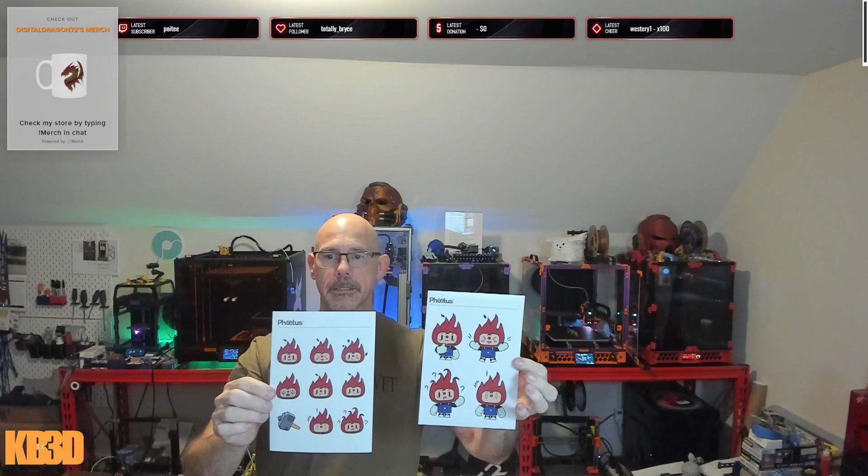And then the other thing that came in was the long-awaited 10th anniversary box from Phaetus. So we got some Phaetus stickers. Always cool to have stickers, right? This was the thing they were doing on Twitter where you printed off their little guy here and got things. So I got stickers and I got a shirt.

Apparently it's the Rapido 2 shirt in white. And I just realized that it comes complete with a hole, so I have a hole in the shirt. I don't know what hit it, but that's no big deal, it's in the back, we can fix that. But yeah, it does have the Rapido schematic on it for the exploded view, so that's kind of cool. Another shirt we can add to the t-shirt collection.

And then we got some of the AE Worthy ABS glass filled, 10% glass fiber reinforced ABS, it is black. I was going to show it to you, but apparently it's well sealed, so we'll have to do that on show sometime. Nozzle temp 250 to 270 C, bed temp 100 to 110, 30 to 90 millimeters a second print speed, 0 to 20% fan, and of course a nozzle that can handle abrasives. We'll add that, we've got several printer builds coming up, we can use this in one of those.

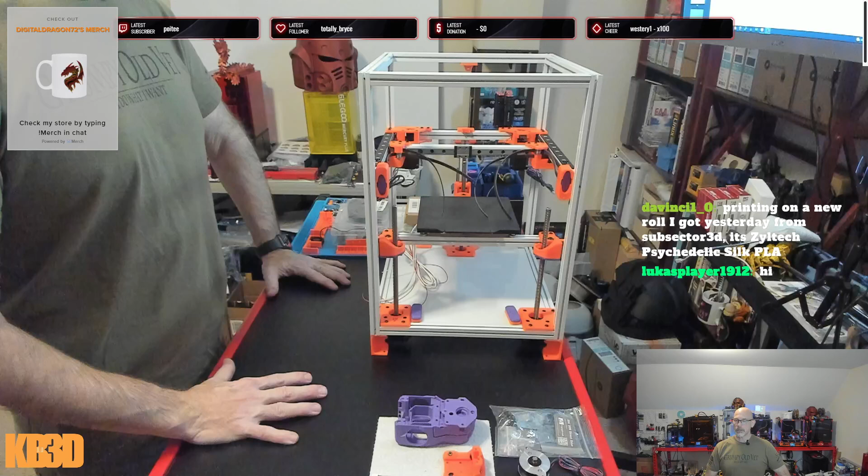So you may notice a couple of differences tonight. We've got this camera, but we also have that camera. The camera over here on the left side of the screen is the Logitech C920 that used to be right here. This is my other Brio camera right now, so we'll be working with the Brio cameras as the primary and secondary view. The 920 we'll be able to bring over here and sit on the desk if we're doing something where we want a little bit closer in. I still want to get a ceiling camera mounted, one of these days I will get there, and it'll probably be one of these that'll go up there.

But yeah, stay in your lane, KB3D. Make it home safe.

So I got another batch of stickers. Originally when I ordered my stickers they got delivered to somebody else, so I just chalked them off as lost and ordered another set. I've got plenty of those stickers now. I still haven't received the shirt or the hat that I ordered. We'll see, maybe they're coming, maybe they're not.

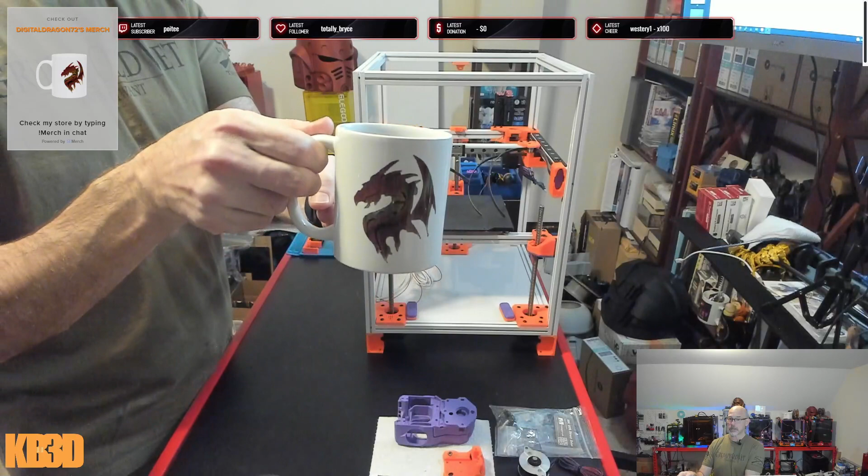I know the hat, since the shirt is silkscreen, so we should be good with this design here. Should work fine for silk screening, right? They were having a lot of issues with the color transitions and the embroidery, so I think I'm just going to take it down to straight red, get the outline, make it red, and do that for the hat.

So, where were we? When we left off, we had run our belts. They're very loose because they're just sitting in there right now. And we were starting to build our boop, and in order to build boop, we needed to...

work with the tap. So what we did was we had all the printed parts for boop, except for the magnet holders - these things. I printed those out and was checking the tolerance and fit of the magnets, and yeah, the magnets go in, they fit well.

I was just feeling froggy today between meetings and training meetings, so I went ahead and put in the heat sets on these. They have a heat set on one side and the magnet, and it will go in your holder here, and that's where we're going to get started.

Now, I did notice that some of the screw sizes are a little different, and that's why we need to have CAD up to look at it. I did go ahead and put Fusion 360 up here so I can check what size screws we have and so on. So that's M3x6 for the belt clamps and stuff.

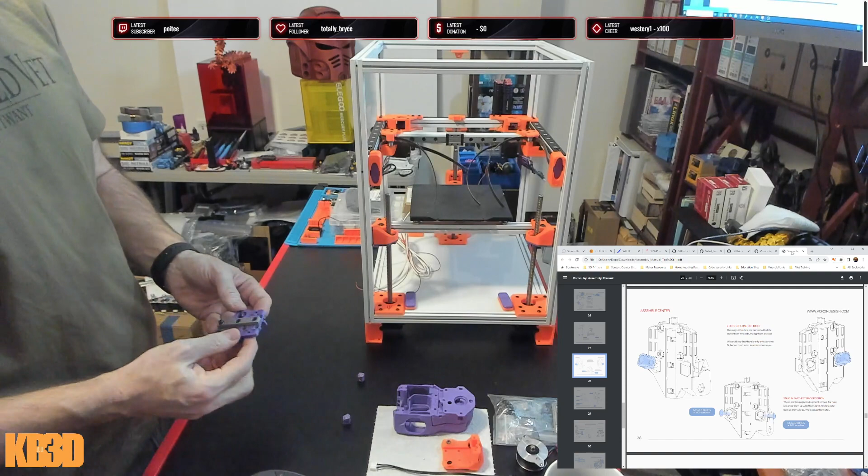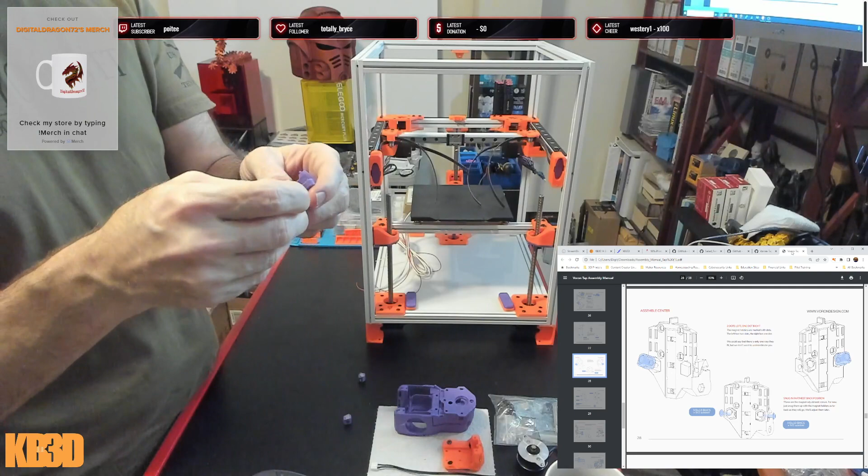You may see me doing some stuff off screen - that's just me clicking around trying to figure out bolt sizes, because I know some of them will be different. One thing I don't see called out in the tap, but do see in the CAD, is there are two channels on either side. These two channels take an M3x40. This just sits down there, and we're going to screw it all the way in to provide some additional rigidity here. We need to start off by doing that before we get too far, since I'll simply forget otherwise.

But yeah, how's everybody doing today? The 3D printer workshop is almost back together.

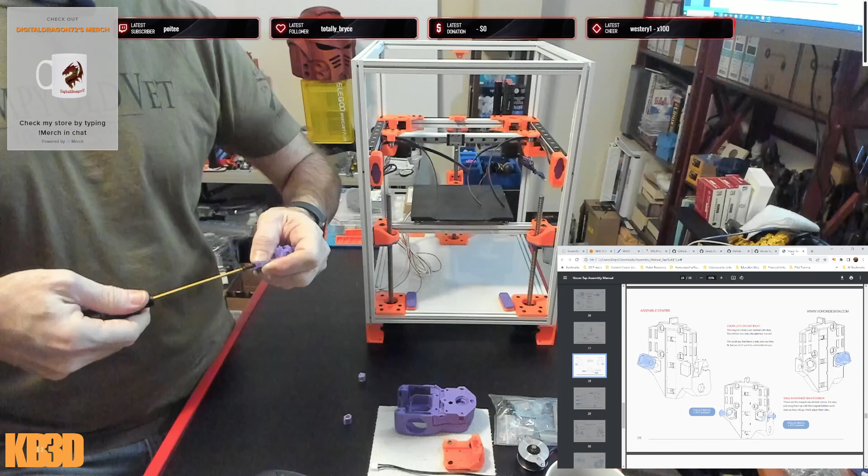Well, Timur, that all depends. If it turns out being easier to work in the workshop and easier to find things, then I would say it was worth the time and effort.

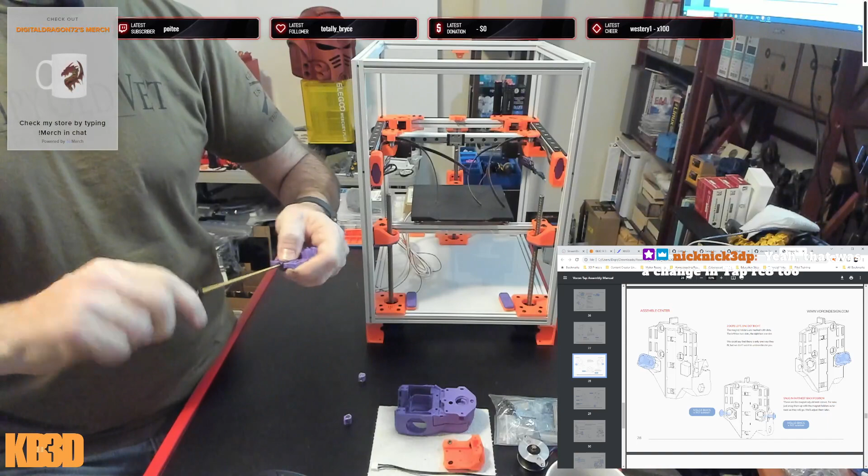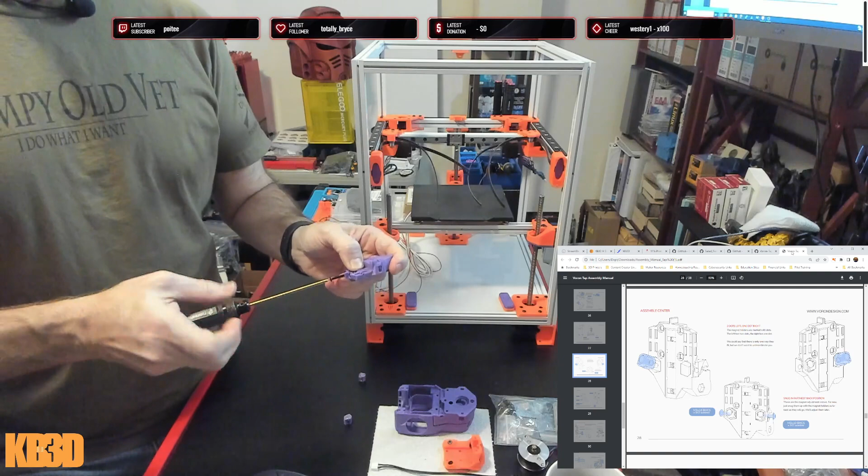Is this going in? Okay, yeah, it is. It's just a very, very long screw. I think that's what I'm looking at is the manual for tap 8, but maybe when I originally did my tap, it was before the RC came out, so that might be it. But yeah, this just adds a little bit more rigidity to the printed part.

And from working with the optical sensors on the Prusa machines for their filament runout sensor - if for whatever reason your printed part here, because this is not black, right - if for some reason we start getting flaky or not triggering, one of the first things I would do is take a Sharpie and blacken this little flag tip up here, because this is what's triggering the sensor. It could be the sparkle fleck in here or whatever, but if you have any issues, just take a Sharpie and color this in. That has cleared any false positives or false triggers I've had on my Prusas.

And then I also got in some generic 7x7 drag chain for the build. I've got a couple of other things printed out that we'll get into a little bit later, namely some Wago mounts that will mount on either side of the long bar underneath here, and some mounts to put some underbed fans.

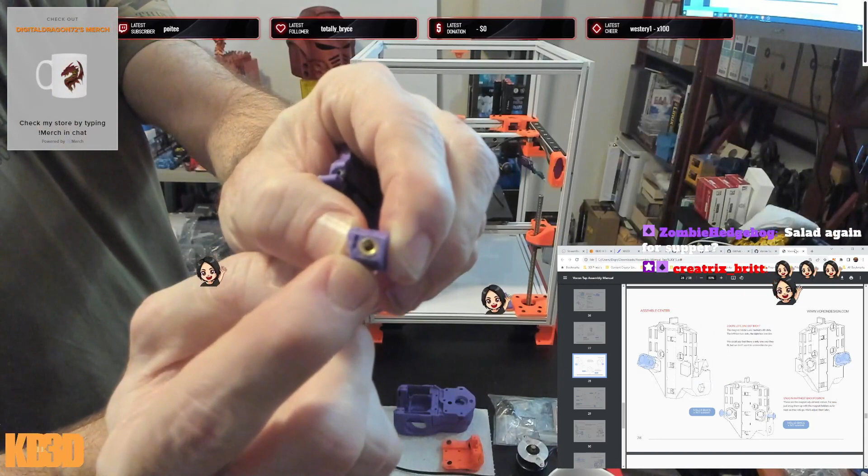Hey Britt, welcome on in. Hey Zombie, how's it going? Yep, salad again for supper with a side dessert of Dunkin' Donuts.

On here there's little marks, so this one has 2 and the other one has a single tick mark on it, and that's how you know which side they go in. The one with the 2 goes on the left side, and the side with the heat set insert goes towards the center into the rail. You'll put that in, and then we need an M3 by 10 button head cap screw and a washer. We're just going to go in, through the whole part, and then locking into that heat set insert. Make sure it's pushed all the way down and tighten it in and lock it in.

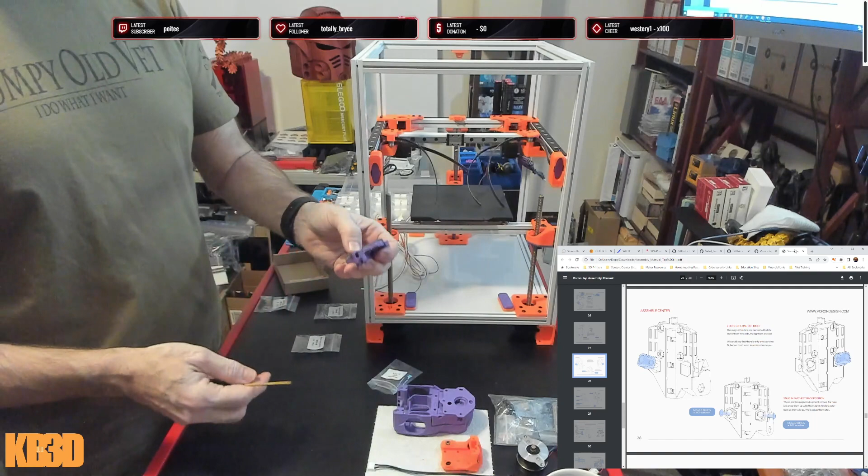Because what's going to happen is once we get these in place, we will loosen these screws, and it will attach to, it'll do the magnet thing. And then we'll have our set location, and we'll get into that, you'll see what I mean in a little bit. So we got both of those tightened down.

Now, we went ahead and already mounted the rail, we did that on the last stream, and we're going to connect this to our center rail with M3 by 6 button head cap screws. What I'm going to say before you connect it is at least run one side through your channels here for the belts, to make sure you've got a nice good path and can get your belts in there. If not, which they may be fairly tight, you're going to have to work on them some.

Just make sure that you get the top in the top and the bottom in the bottom.

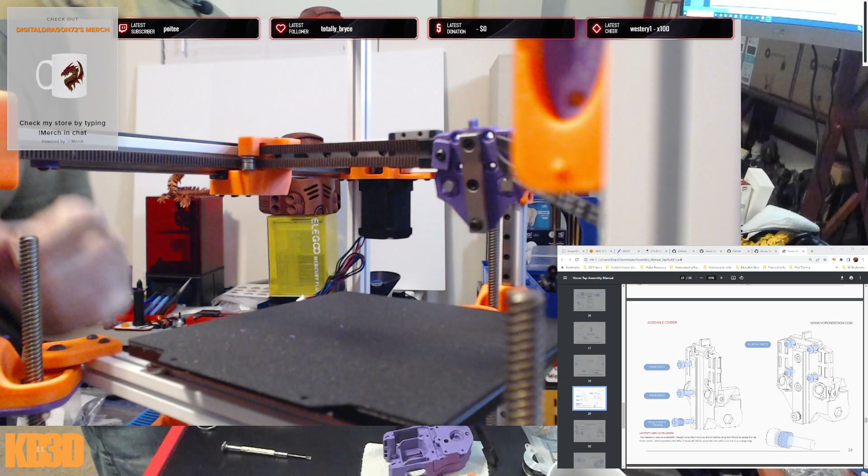All right, let me just grab this. We'll make it bigger. So we want to make sure that our belts are riding in our pulleys and not up on the flanges, but are in there. Now these we can't, the ones in here we can't really tell. We just gotta hope and pray that everything looks like it's lined up and we're good.

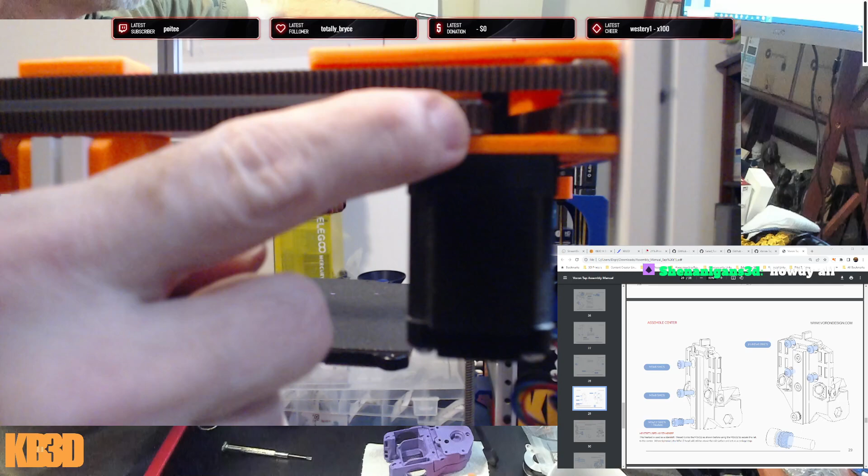The biggest ones are in the back here, making sure that you're riding in your pulleys as well as your drive pulleys. So you need to make sure on both sides that you're in your idlers as well as wrapped around. Sorry, I'm having an issue. And wrapped around your drive pulley.

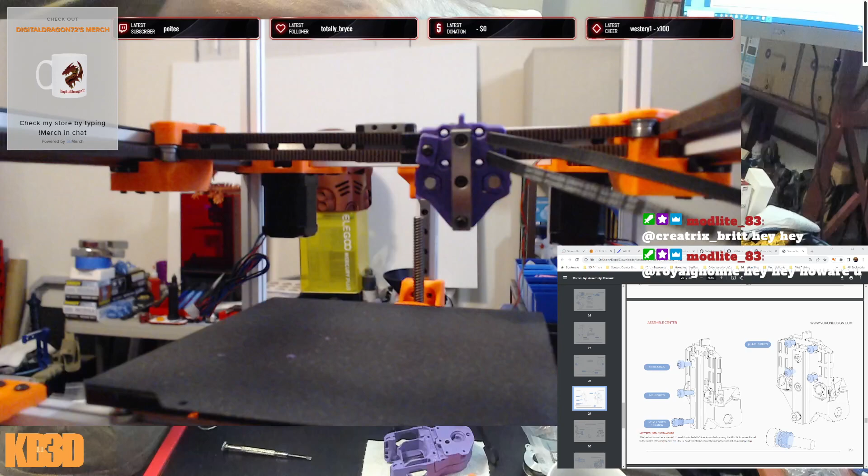Okay, and we've got these, they're not fully tight, they're a little bit tight, but we're close enough now where we should be able to get this lined up and get it initially secured to our plate back there.

And we're going to use some M3x6s again, but I am going to take a quick look at the BOM to see if there is a washer. Not there. Let me hide. No, I need that one. Belt clamp. Remove. Hide that, hide that.

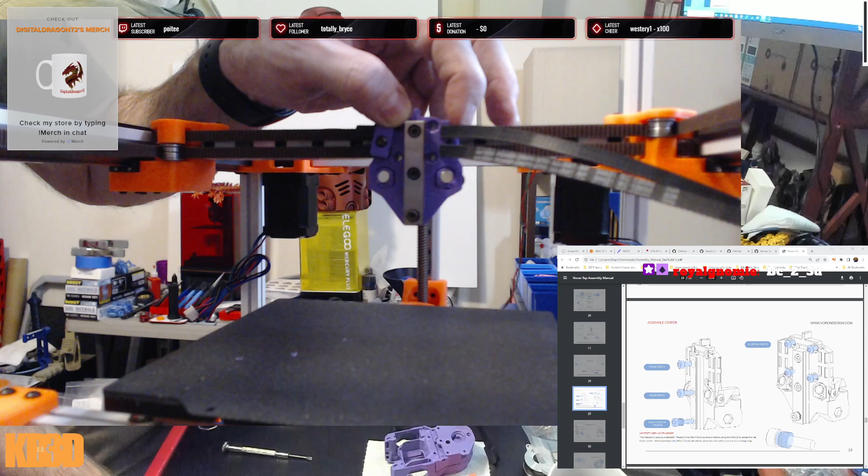Okay, so it looks like the washers are only on the back side there. Okay.

BC_2_3D. So these, once again, are M3x6 button head cap screws. We'll make sure we can get one started.

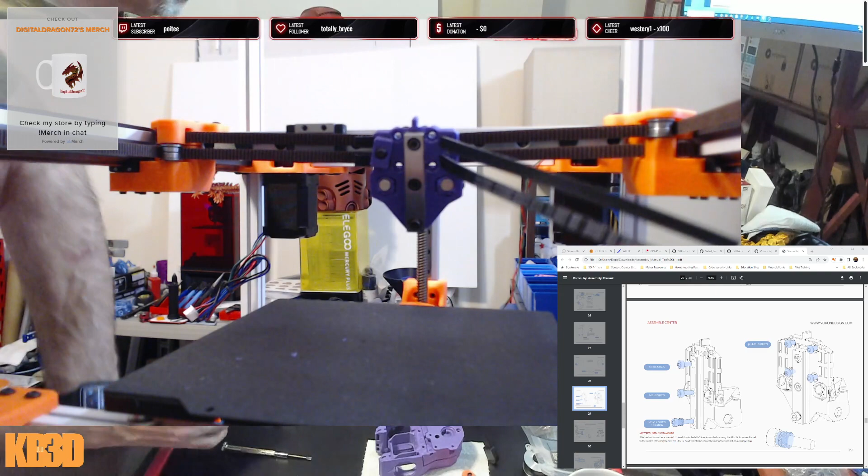So we're running into an issue here. Let's see if you can tell what my issue is. My holes don't line up, which means I need a different style carriage here than what I've got.

What does Tap require? MGN 9H. And apparently that's a 9C.

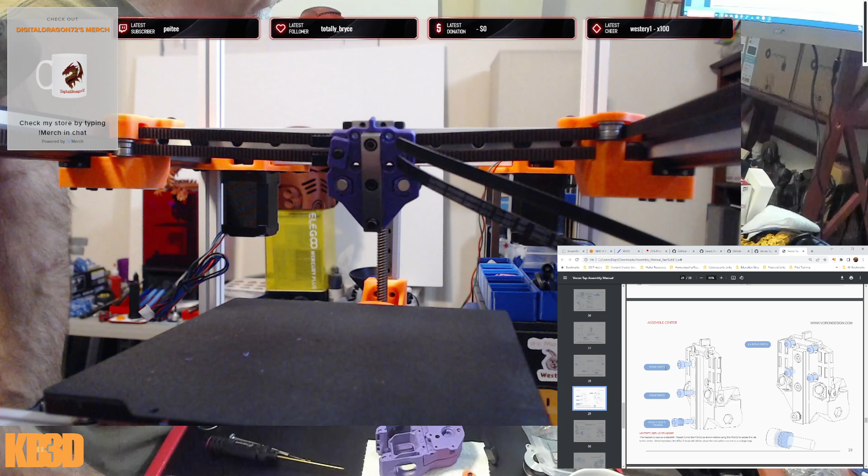Okay, well, I guess we'll be building our tool head. We won't continue much more with the belts at this point because what I'll be able to do is loosen these belts back up here so I can get access, lay it on its back. I'm going to have to take the rail off, swap carriage from a 9C to a 9H, which means I'm going to have to get my hands on a 9H carriage between now and Tuesday so that I can get it on here.

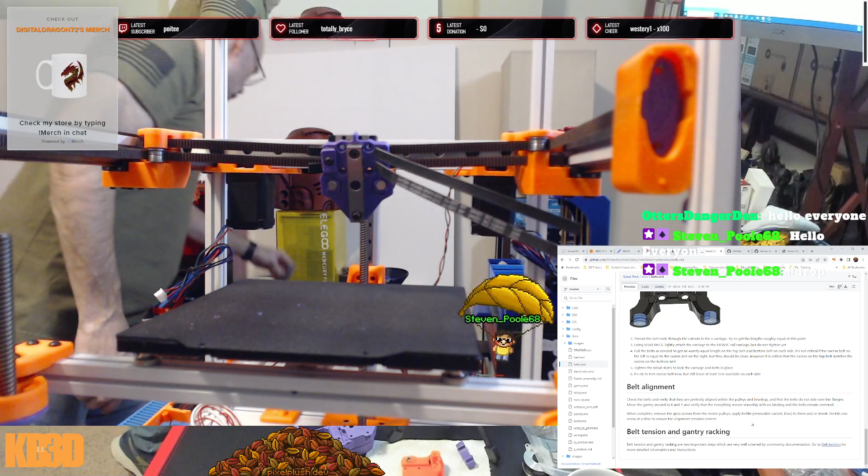So I will order a... hey, Steven Poole, how you doing?

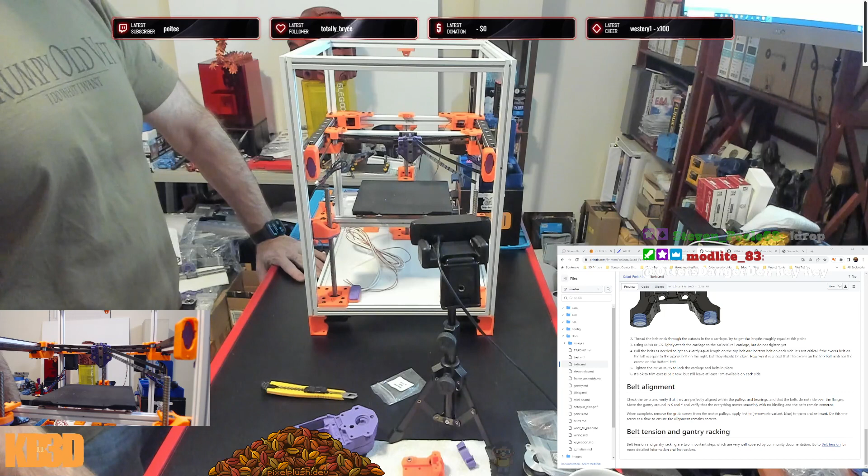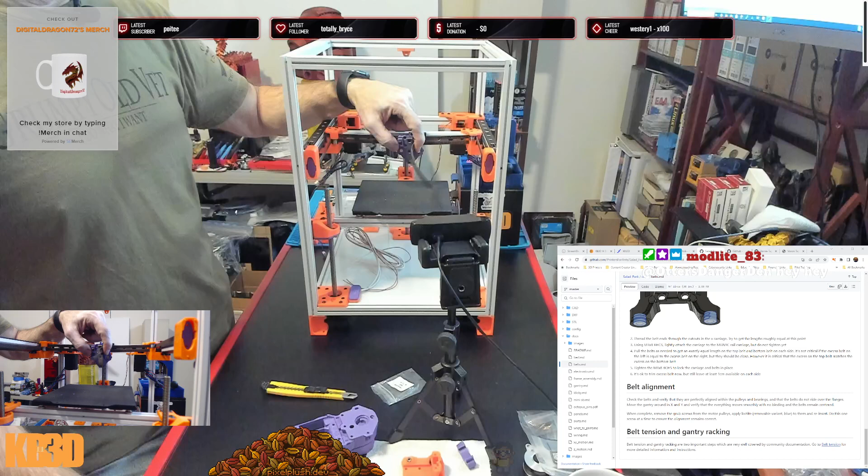Hey, Otter's Danger Den. So we'll say I'm pulling an errand, not in the fact that I didn't have parts printed, but in the fact that I didn't put these two up to one another to realize that this was the wrong size carriage. So I need a MGN 9H carriage to mount this, and this is a C carriage on here. So I need to get an MGN 9H carriage for this rail. I will loosen up these belts and take the rail off, swap out the carriage, remount the rail, and then go on.

Yeah, a lot of carriages are matched to the rail. I'll go ahead and get a whole new rail. See if Chris has one on hand. You know.

So we're taking off tomorrow morning. We're gonna get up, have breakfast. We're gonna take off tomorrow morning to drive to Maryland. Who knows? There might be a pit stop in Fairfax, Virginia, home of Micro Center. Not home of, but there is a Micro Center there. And we'll check that out.

But if I can get it on order now, remember that I've got a good friend by the name of Evil Diesel that lives 5 minutes away, and I'm going to make sure that he's got a key to the house because I've got several packages arriving already.

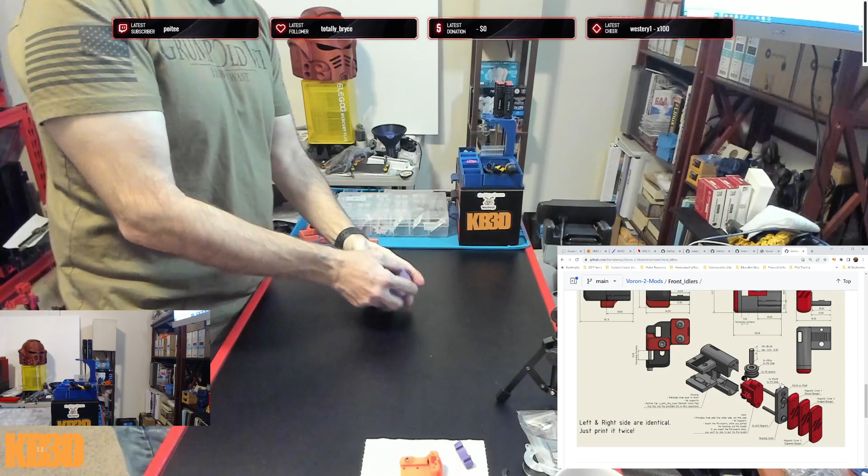All righty, that's at least a couple of other things done. So when we go to take this off, it's not going to go anywhere. It shouldn't matter. I am going to set this down onto the ground to get it out of the way for now, and we are going to start building our tool head.

It has a very nice tight fit on things.

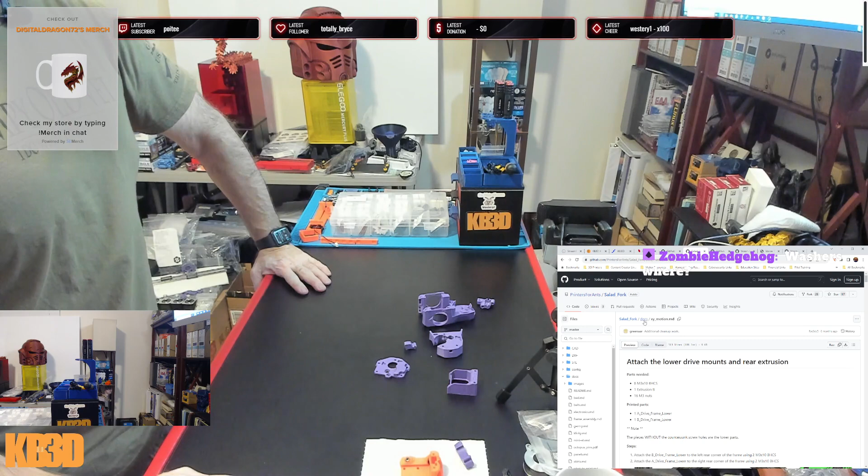Come back over here, put it back at the right magnification, and go back to the docs. So it will talk about doing the belts, and then from the belts going into Klicky probe.

Once again, I don't want to do Klicky. It's a lot more macros, a lot more configuration, a little more complexity, stuff that could go wrong.

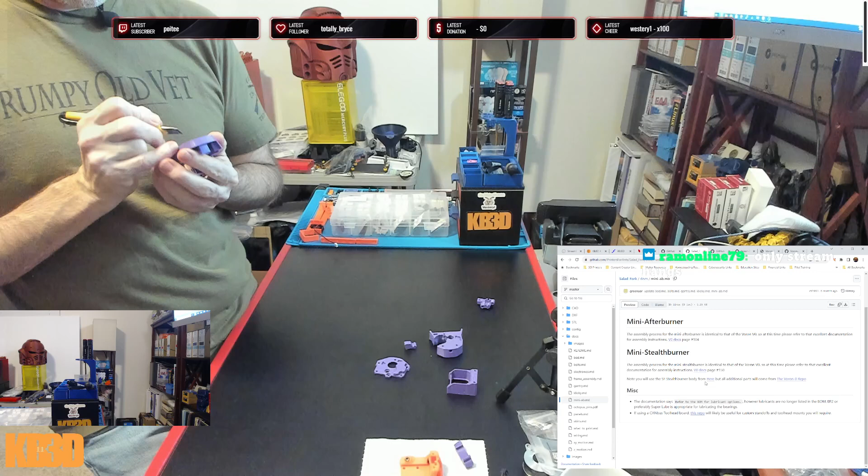Yeah, Orca Slicer was weird. I found this out late in the game that when I was printing, it asked if I wanted to use mouse ears. I was like, sure, let me do mouse ears, that'll help. And it not only put mouse ears on the external corners, which I was expecting it to do, it put mouse ears on anything underneath, so like all the logos. I basically had to go through and reprint some parts, and hell, I might have to go through and reprint this so I don't gouge it up. We'll figure it out, I will figure that one out.

V0 docs. Currently, the link to the PDF file.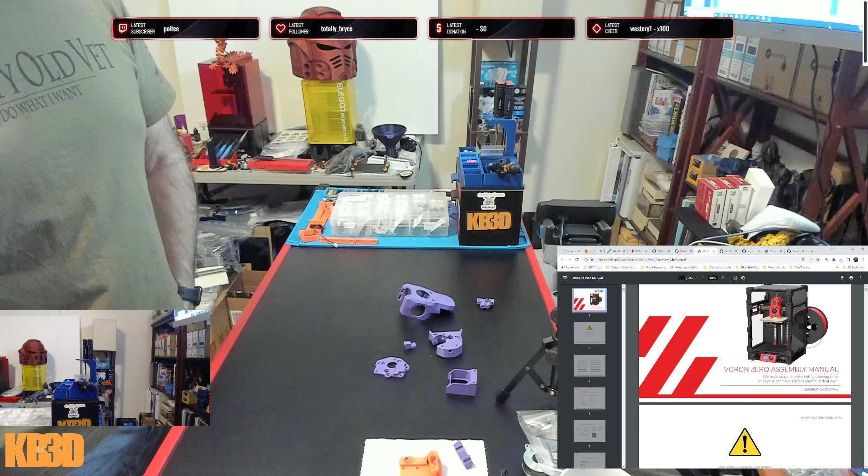Stop it. And I've really got to figure out what is causing things to take control of my mouse. Give me a second here so I don't lose my mind. But something... I don't know why it keeps taking control of my mouse.

All right folks, we went and did this before. I haven't hit anything on my keyboard, right? I haven't been over here typing, so I don't know why or what has caused my keyboard or my mouse to go wonky again. Hell.

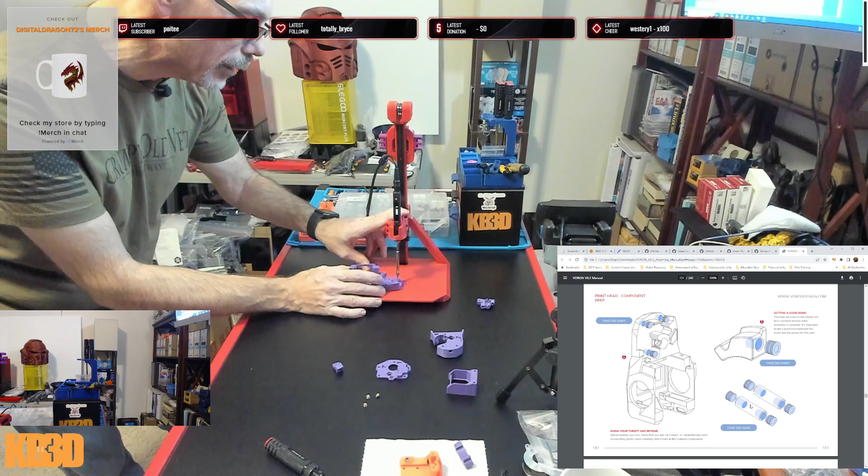Ooh Britt, you're building your stealth press tonight, right? If I remember right, she's going to be printing her stealth press—or not printing it, she's already printed it—but assembling her stealth press tonight.

This is so nice, we got the top two done. Now we need to get the one down here on the sides. This is going to kind of be the pain in the butt.

Okay, so we got all three of those done. We're going to need one more, and that's going to be in the end of our shuttle piece here. There's no real easy way to make this work, so we're going to work hard not to burn ourselves right here. This is going to be one of the few times we're actually doing it by hand. Might be easier and better, because it's just an awkward little piece, but we got that done.

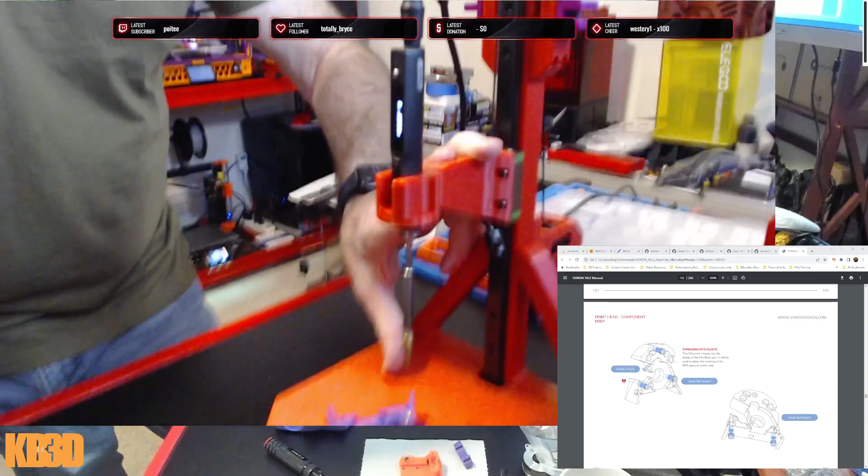This is probably the one we're actually using this camera and making it bigger. It proved beneficial. You should be able to see what I'm doing—color washed out and everything.

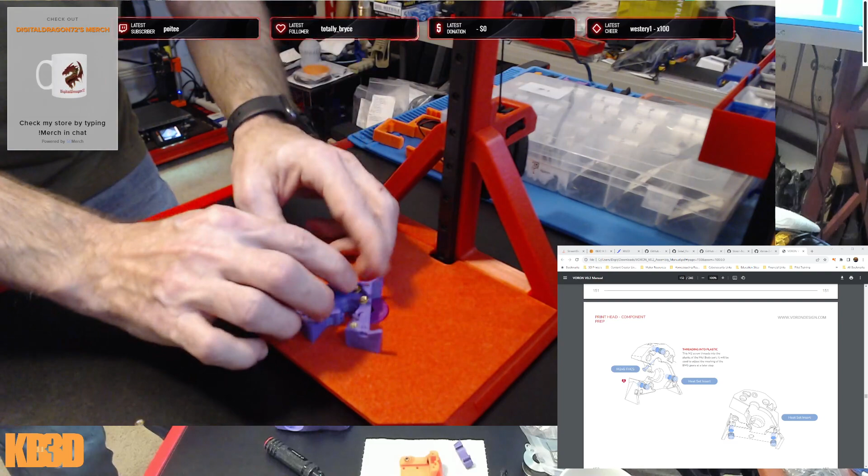So trying to get this lined up right there in the hole can be tricky. If you want to, you can start and just get your heat set there, get your iron started into it, and then drag it over into the corner and let it drop down. If you're having a hard time getting it over here in the corner and started, it's going to be so close to the wall, so you really want to make sure you're not melting the wall as you start to melt this down in there.

And then slow constant pressure. We got those three there. Now we need to do the two at the bottom.

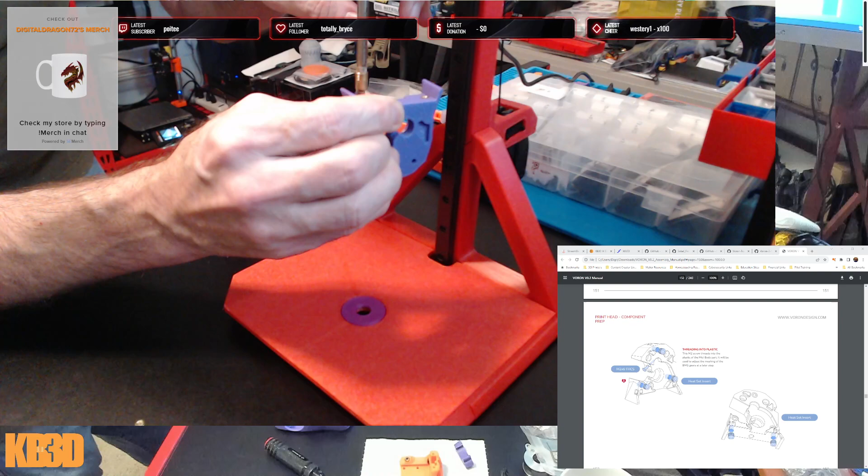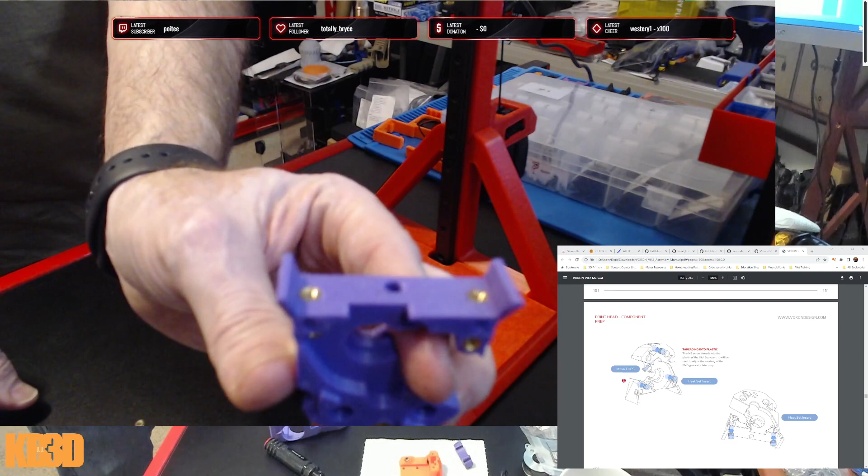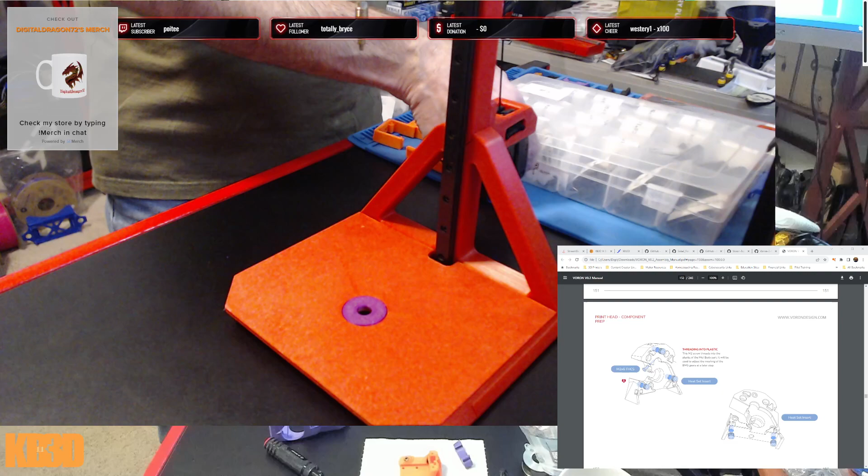We'll do just like that. And we need to put in an M2x6 flathead screw. Do I have an M2x6 flathead screw? An M2x6 button head cap screw. An M2x6 cap head cap screw, otherwise known as the anti-squish thingy?

Oofta. And that's going to require one of my ball end drivers because this thing is super duper tiny small.

Yes, this requires the 1.27 millimeter head, and it goes right in that hole. Whoops, right there, right in that hole there. So I'm going to be super awkward trying to get started too, using a ball end driver to do this.

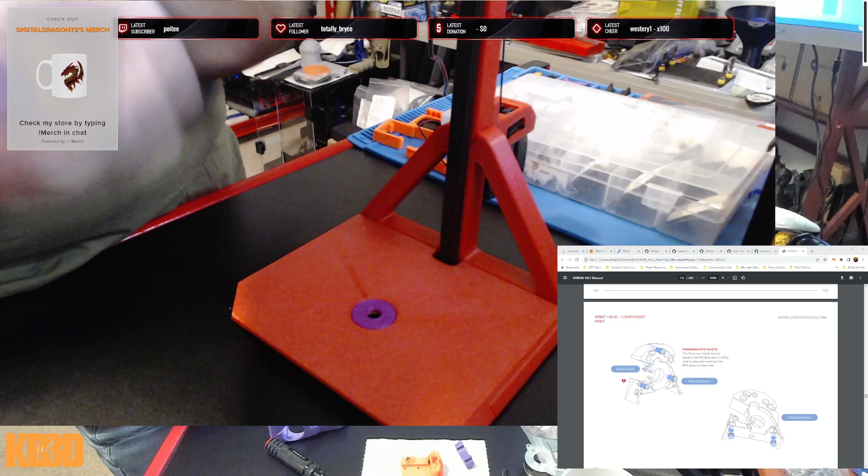I'm just making it flat and flush to the top of the printed part.

Okay, all right Da Vinci. Hey Mad Cat, how's it going? We are having a blast.

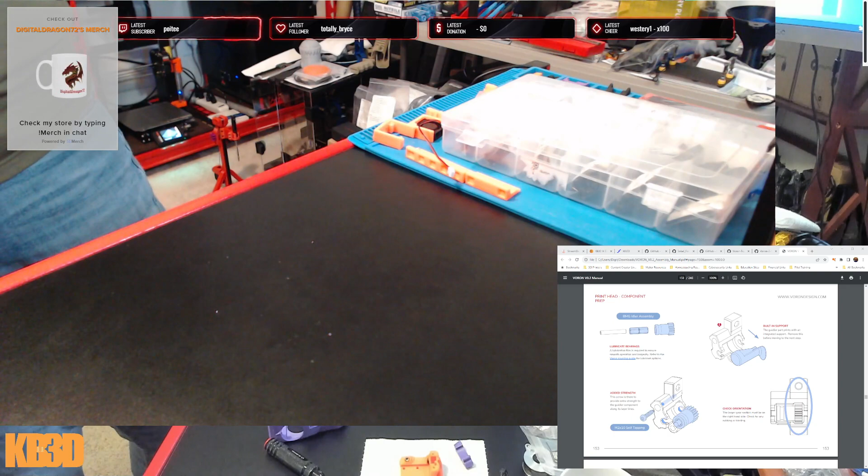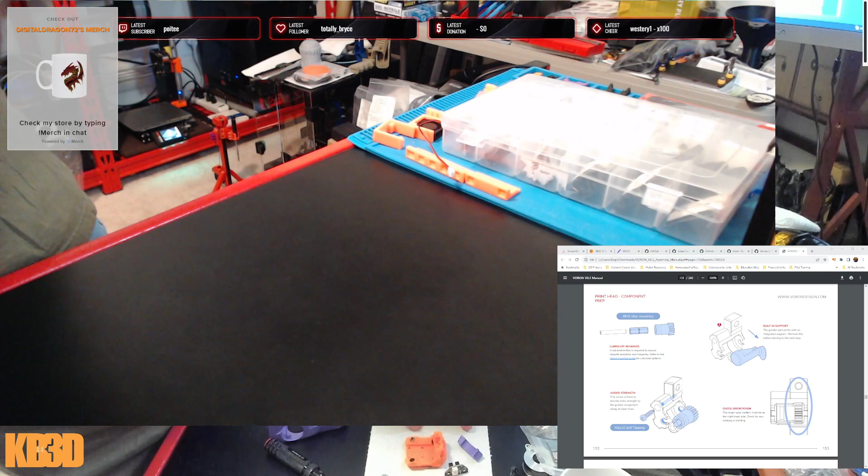Yeah, we've already found out that I need to order a different carriage, which means I also probably need to get a completely different rail and carriage, because the carriage on the x-axis for the printer is an MGN9C and Voron requires an MGN9H. So we're going to need a new one of those. We're going to just take these Voron parts and set them off for a second. This will be the cable for the sensor, and this will be the end stop for the x-axis.

Okay, now we need to grab our lube. Where's Pez Liz when we need her? And I'm not going to fully glove up for this.

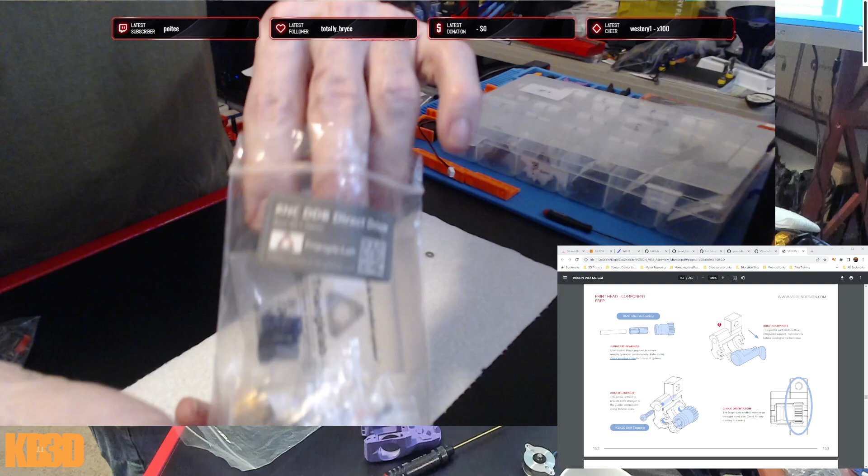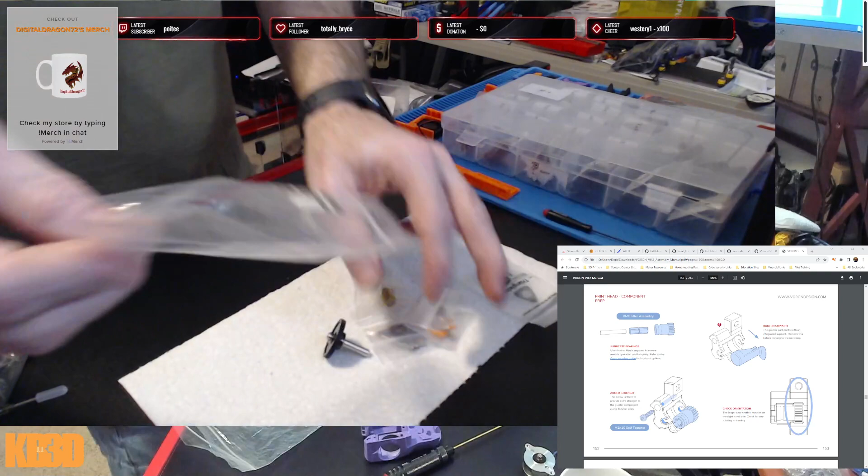What we're going to need is our gears. Now I'm using the RNC DDB direct drive from Triangle Labs. I believe it was TH3D, I think it's the guy's company. They had a lot of these on sale, and I was like, sure, why not? So you won't use that gear, I've got like 500 of them. What I'm going for is my needle bearing.

We're going to need our needle bearings and our idlers. Now on your idlers, as we talked about before, one's going to have a set screw, the other won't. This is your idler gear, so this is the one we want to use. You're going to put your needle bearings down in there, one on top of the other, using your finger at the bottom to hold them in so they don't drop out.

You're going to squirt some of your EP2 in there and make sure that it stays in there.

You need the smaller of the, you've got 3 different pins here. You need the smallest one because that's the one that fits your idler. So you're going to take the smallest one, push it right down into that grease and push it. You'll see that bearing start to come up because the grease is getting pushed in. Use one finger, push that bearing down, and continue to push that rod in. Go slow, you'll feel and see the grease come out the ends there, and that's what you're looking for.

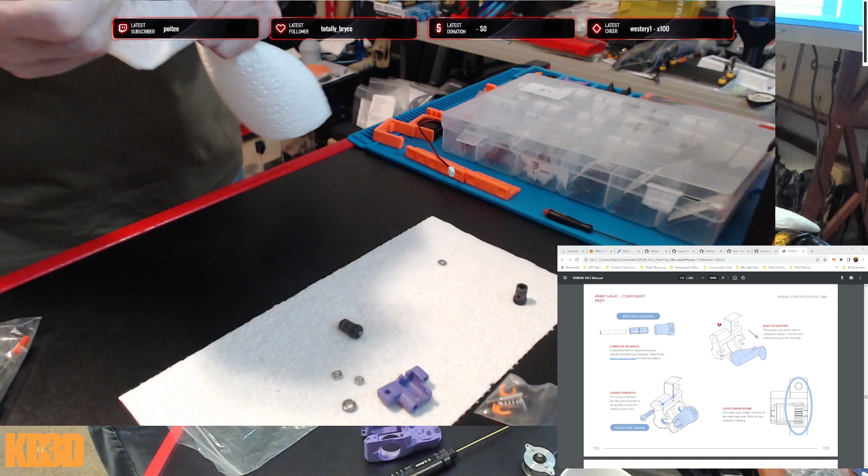That has just pressed all of that grease into the gears, and then whatever's left, you can clean up real fast. So wipe the tip of your syringe, put the little cap back on. You do want to not drop that on the floor, but you do want to try and get the excess off.

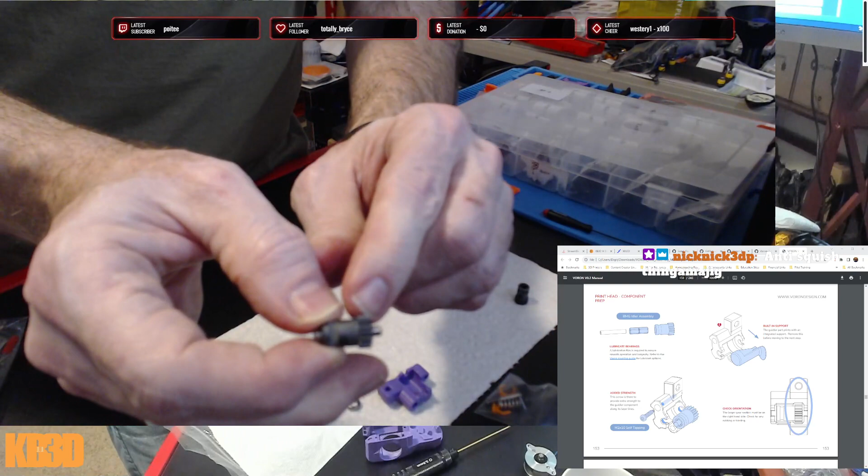If you get a little bit of grease on the big gear side, that's not bad. If you get grease on the teeth here for the filament, that's going to cause you to slip. So you just want to make sure, especially at this end, that you're very careful about wiping the excess grease off and not getting it on your filament teeth. There's a little bit of grease in that gear right there, that's perfectly fine, don't worry about it.

I've already popped the piece out of here, so you can see that it's got the contours of your tooth pulley. Just line that up and push it in, you should hear it snap on both ends. Go ahead and turn it around, make sure it turns with no issue.

Okay, so now we've got our idler assembled, and we need to put in, this is just adding for strength, an M2 by 10 self-tapping screw here. And I hate the self-tapping screws that came in this kit because they are a Phillips head, and I hate them with a passion. So we'll use the ones here that have a hex head to them.

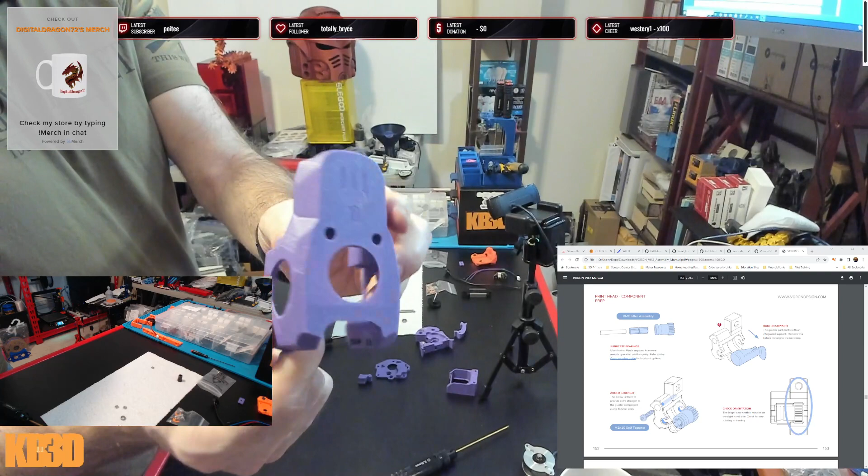Oh, hey Britt. Yeah, so this view right here is from the C922, let me, which I now have sitting over here on the bench. But this is the Sparta 3D—no, let me rephrase that, this is the Polymaker Galaxy Purple. I just know the color is better on the Brio camera over here.

Okay, so we've got that, we checked the orientation, really it only goes in one way. Now we need to check and make sure that we've only got 3 millimeters between here and here, and that looks like there's going to be more. One easy way to tell is I've got a sanding jig here. If I put this in there and push it all the way in, it doesn't come through, so that should be good. Let me just double check it. Eyeballing it said that we weren't good, but we're right at 3 millimeters, so we are good actually. It just didn't look like it when I was first looking at it, but we're good.

We want to check the bearing fitment, so we're going to take our bearing and slip it onto the front, make sure it goes on, and onto the back, make sure that it goes on. That went on, we're good there.

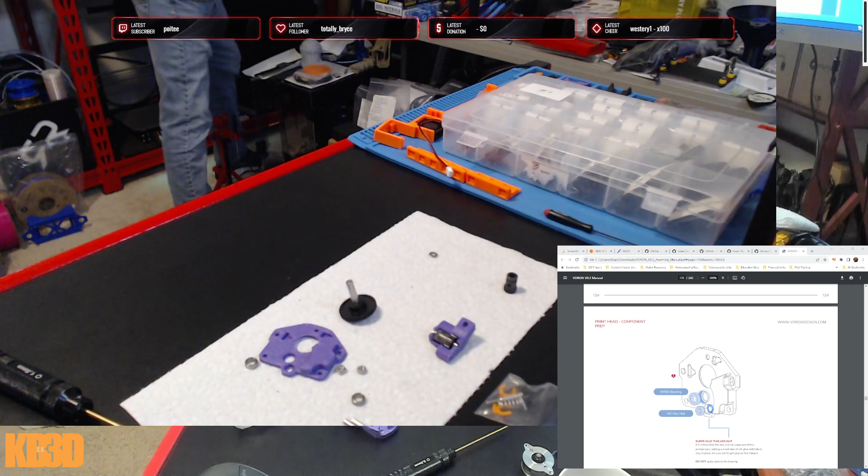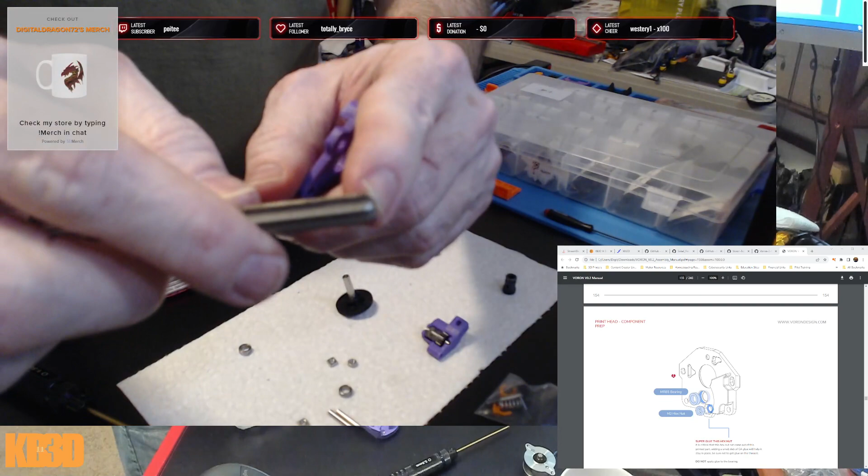Now we're going to take our back plate and put a bearing here and a hex nut down here, so one of the bearings. Seems pretty tight fit to me, I don't want to push it. These are MR85s, which means that's an 8 millimeter outer diameter. So this does have a sloped or a chamfered edge, so it's not going to get all the way down there, but it will clean up right at the top edge.

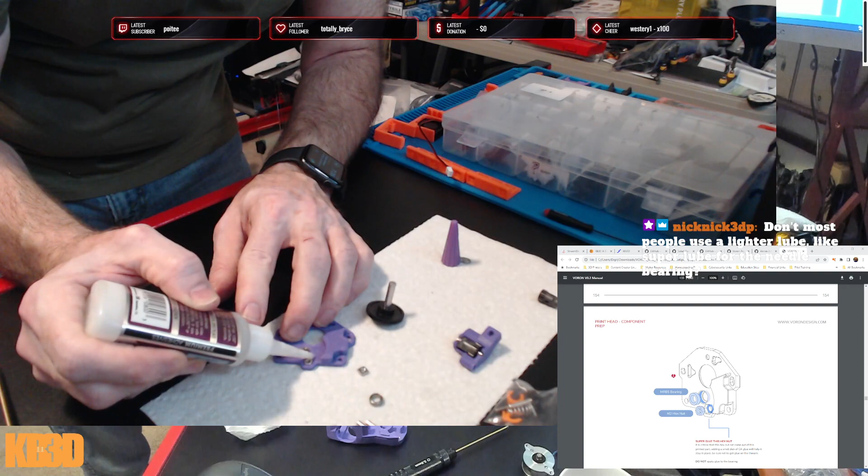Just add a little bit of super glue there. Wipe the excess off. Let it sit there for a few seconds.

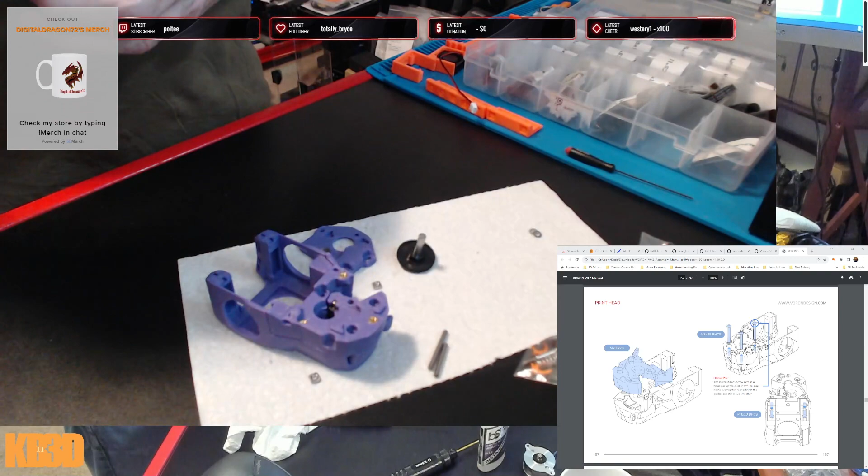I have super lube, but I don't want to use like an oil like this. My super lube is going to be like what I used to use for all of my LM8UUs. We're using button head cap screws, by the way, and we're going 2 at the top, 1 at the bottom.

Okay. This one's becoming the hinge pin for our idler. This one is the hinge pin for our latch up here. That's why you might see me try and wiggle it a bit to get it to line up right.

None of these do we want to crank down tight. We're not trying to torque these down, we're just trying to use them to hold the assembly together, because we still need everything to work.

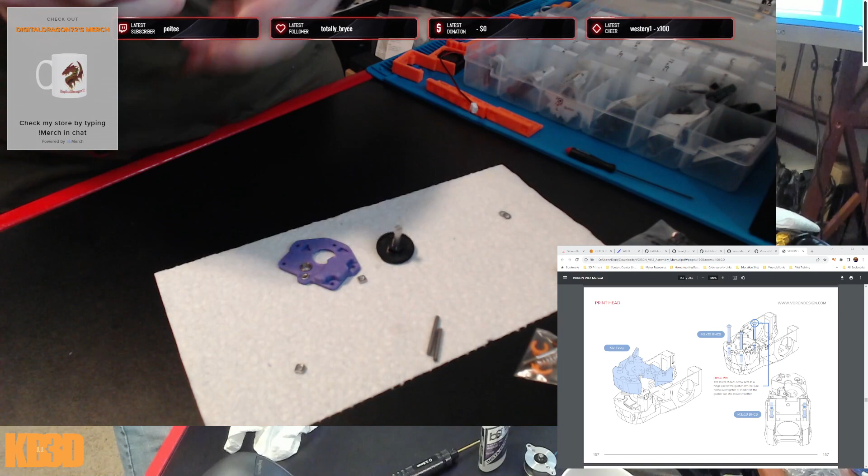There we go. So once again, let's get them down to where they're nice and snug. Not tight, but just snug. Snug as a bug in a rug.

All right, so I'm just making sure that things still move and the latch, they can still move. This latch is kind of, you know, it's tight. It will work loose a little bit over time. But that little ear is feeding down to the shuttle, so when this opens up, it by definition forces this out some. And it's not a whole lot of travel, as you can see there. Okay.

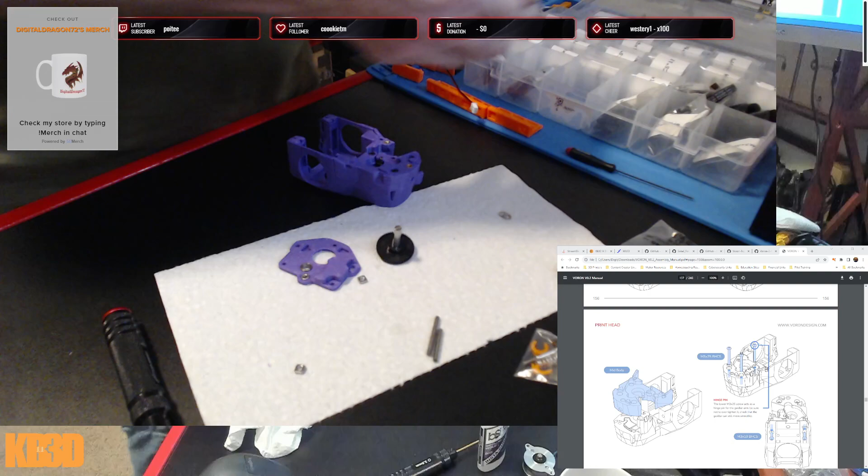So we got that in there. Now we're going to take 2 M3 by 10s and come up through the sides here. So M3 by 10, once again, button heads. And we may need to use our ball head drivers to get to these.

There we go. So that's done now.

Next step, we'll be using our main gear. We're going to take the gear that has the set screw in it. We're going to pull that set screw out and put some Loctite on it.

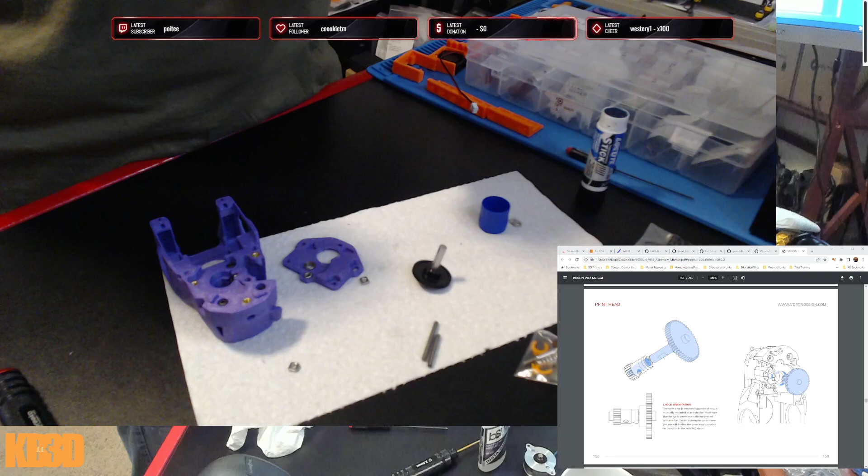You're going to see that it goes on with the filament teeth towards the big main gear and the meshed gears towards the end. All we're going to do is get it to where it's within that range of the flat.

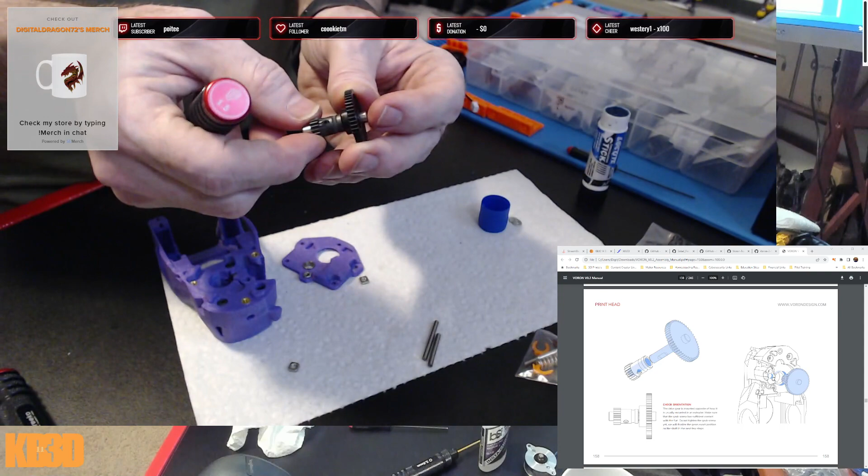We're going to tighten it down, but not all the way. I want it to be able to move some. We will tighten this down fully as soon as we're done. So it's just captive now, right? That's fine. It's not going to twist completely out and off the flat, and it does have a little bit of wiggle room.

So now that we've got that in there, we've checked the orientation. We're going to take this and just feed it right down in here. You just saw me, I moved that idler out of the way so that I don't have an issue meshing any of the teeth as I put this down in there.

Now I can close my guidler, and as I move that guidler it just synced in with the gears and meshed down.

Next, we're going to take our back plate. Made sure our nut was there, made sure we don't have an issue with our bearing, and we're going to put this in place. Once again, it's got a couple of little keyed divots in it that will key with the top plate here.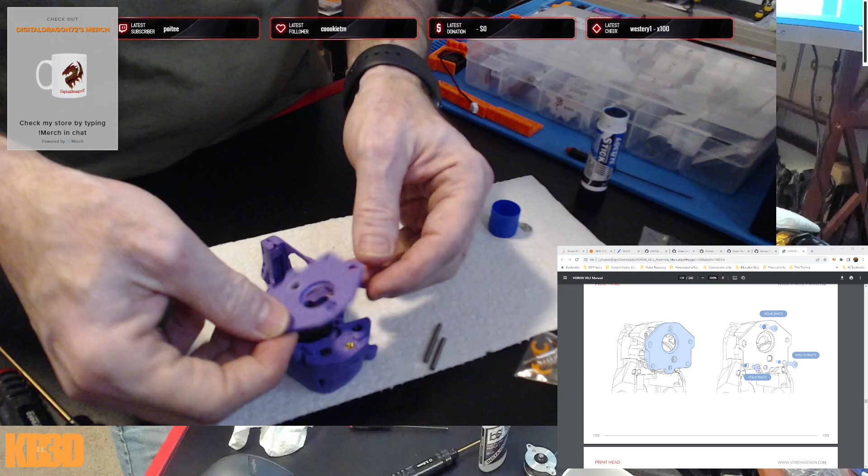Just line those up. Make sure that rear bearing's lined up. Press everything together, and we're going to use M3x6s and an M3x10. So, a couple of M3x6s.

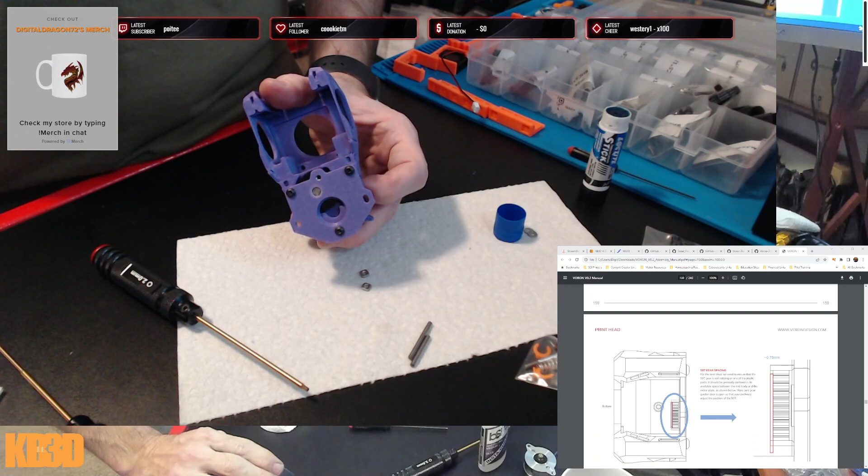And we're looking at it from the bottom. We want to make sure that there is spacing between the housings, and we do have some spacing. I am not getting any binding. I am able to move that, and see a little bit of light that's getting through there. So we're good.

Uh, a filament test. We're going to align the drive gear. We're going to pop the top, which will let the guidler fall back some.

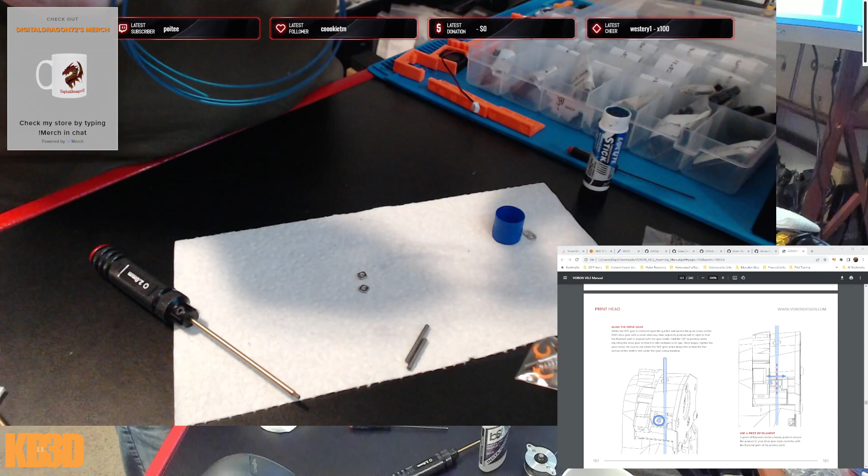And we need some filament. What do we do with some filament? There's some filament, look, it's like the end of a roll or something. We're going to take the filament, push it through there, and we're going to use that.

Lighting's going to suck. We're going to use this filament to line up the gears, or at least the one drive gear. We need to put it in a position that we can get to the screw, which is a pain in the butt.

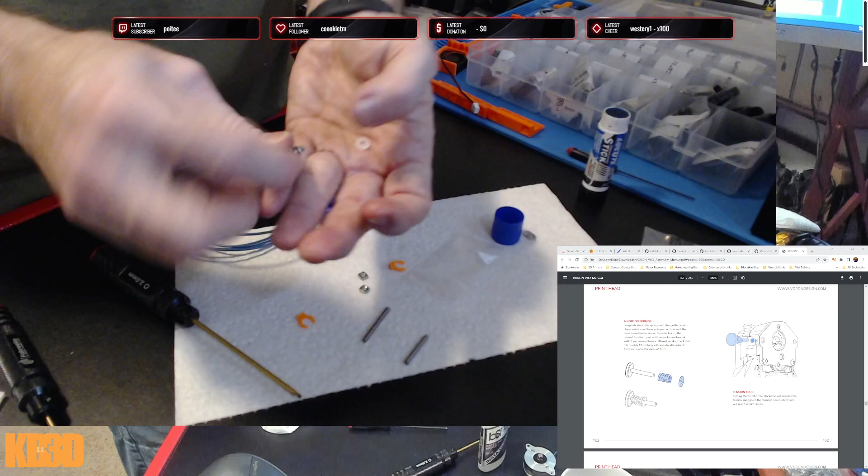And then we're going to add our spring tensioner. Well, for this, we want to make sure that we have the spring as well as the plastic washer. Okay, really need that plastic washer there, because I just dropped the plastic washer into the extruder.

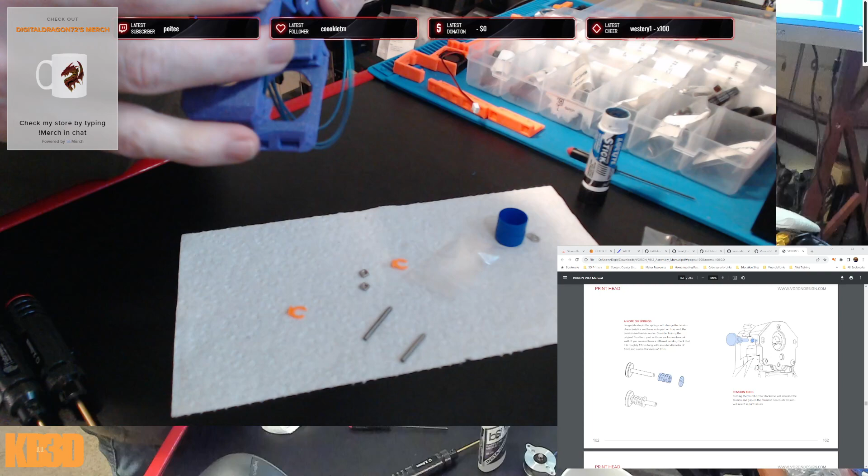So go ahead and latch the drive gear and then get your spring and washer in there and started.

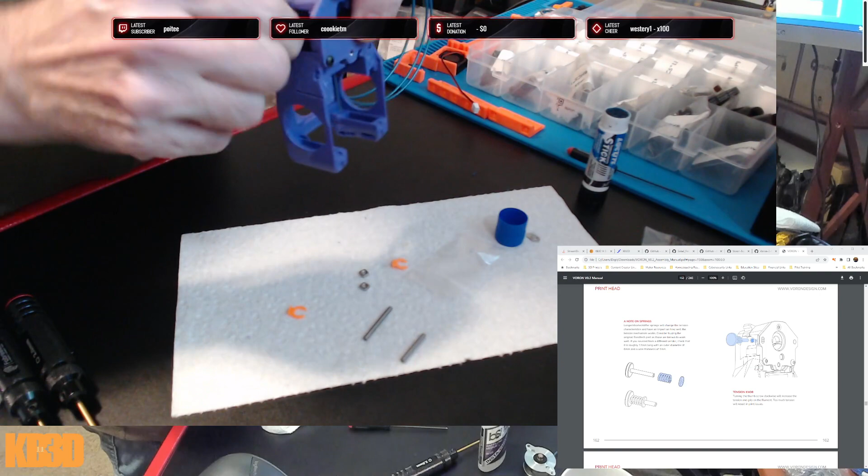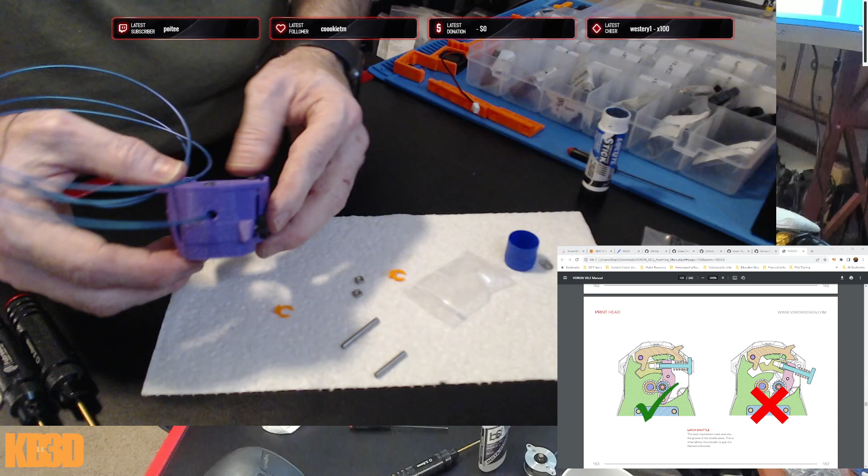Too much tension is going to result in print issues, but you want to make sure that you're getting enough. Here's what we're looking for. You want to make sure that shuttle is fully locked and your arm is vertical. Your arm or your knob is vertical. If it's at an angle, then your shuttle's not in there right, and you're not going to be clamped down right on your filament.

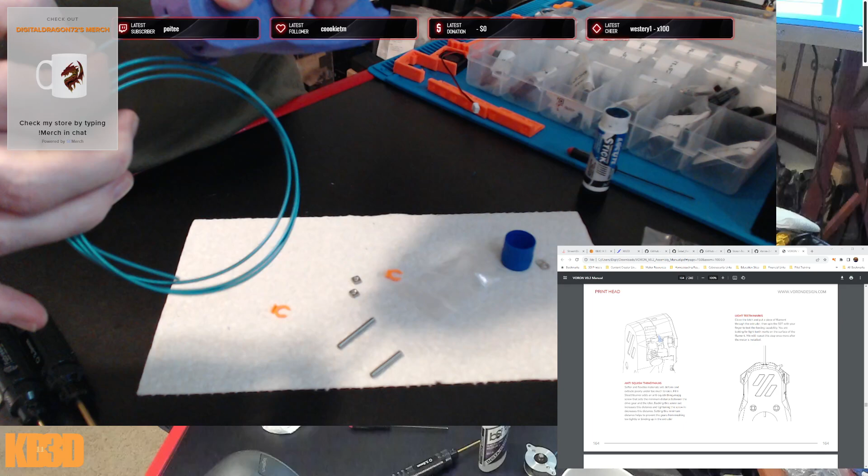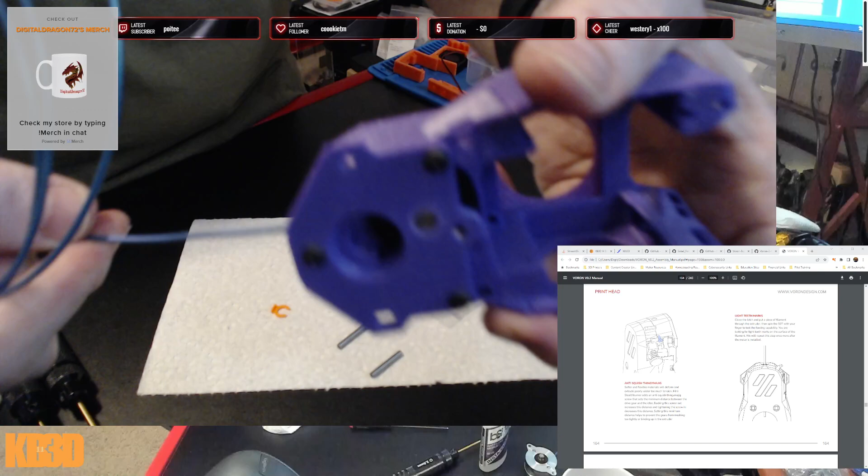You do have your little anti-squish thingamajiggy that you can screw in or screw out. It was that little M2 by 6 countersunk screw that we put in there. You should be seeing light teeth marks when you close the latch. Put a piece of filament in there and then pull it out. You should be seeing and feeling light tooth marks, and you might have to look at the light, but you will see ever so slightly the little teeth marks, and I don't know if I will be able to get them to show up on the screen. Probably not.

Sort of see it right there by my finger. There are little light teeth marks here. I could probably go a little bit more tension, but I am getting some light teeth marks on here. And we're good.

So now we need to start adding our fans. Did this come with fans? This did not come with fans. And I need, these are 3010 blowers. Let me go see if I've got my 3010 blowers over here.

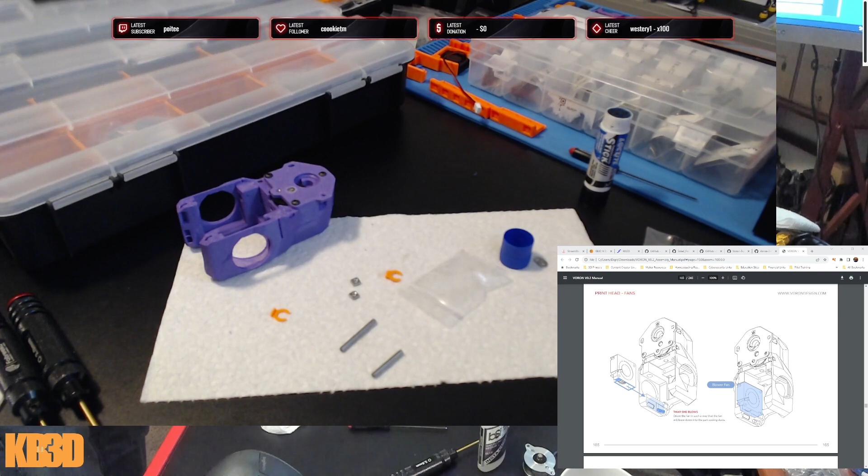And apparently I do not have 3010 blower fans. So, one last place. See what we got fan wise. 3010 blower, and is this a blower or? No, axial. I do have 2 blower fans that I can use.

We are digging for fans, and I think I just found the fans that I need.

It's been one of those days already with the stream where we've had to search for a few things, and find out that the biggest issue is we wanted to go with Boop, and the default carriage for our hot end uses an MGN9C carriage, and Boop requires an MGN12. So I'm going to have to do some acquisition between now and next stream.